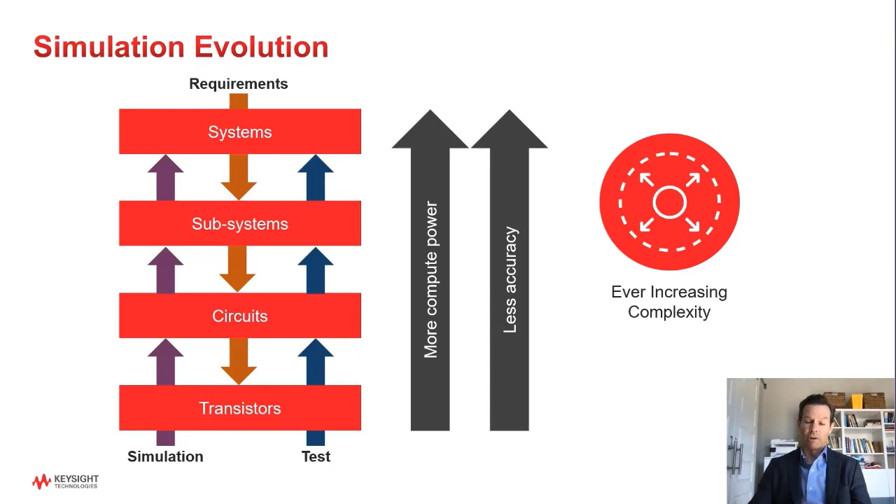We would need to make sure that our communications are secure and our products are safe and effective before they are deployed. This is where high-performance cloud computing comes in. Until recently, cloud computing was optimized for things like e-commerce. Now, Amazon, Microsoft, and others have added very high-performance compute machines to their clouds, which enable highly complex simulations. We can now apply an almost limitless on-demand amount of computing to these problems.

This means that we could take on larger, more complex simulation challenges, and that our simulations can have higher fidelity than we ever imagined. This has enabled a surge in model-based systems engineering, or MBSE, and digital twins. Neither of these concepts is new, but both are becoming more common and more practical with the evolution of the cloud. For example, the market for digital twins is growing at 40% per year.

Keysight is a leader in simulation, especially in the areas of wireless circuit and system simulation. However, simulation by itself is not very useful. After simulating your system, you're going to build a prototype and you're going to want to see how it works and where your actual products differ from the simulation. And then what do you do when the test results don't match the simulated results? Was it a defect in the way the device was manufactured?

Was there an error in the way the device was tested? Did the test equipment use different measurement algorithms than the measurements made on the simulated domains? There are a lot of questions and a lot of variables to consider. It becomes very difficult to correlate your simulated results and your real results.

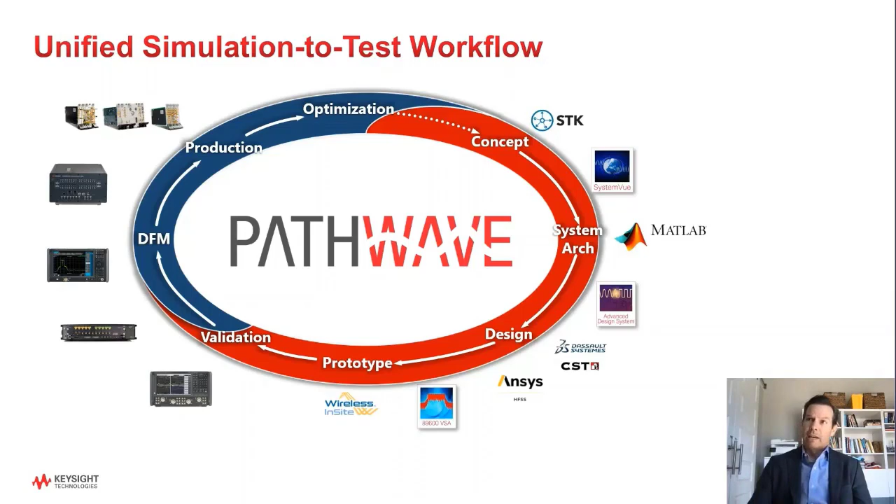Next, you're going to hear more details about how Keysight and our partners are working to improve your development flows.

Enjoy. Hello, my name is Mark Lombardi. I am a space and satellite workflow solution architect working for Keysight Technologies.

Here today to present Escape Velocity: using modeling and simulation to enter a new design orbit. The intention of this paper is to highlight some of the unique challenges in the space industry today, and how modeling and simulation and digital transformation as a whole can help move the space industry forward and accelerate design and innovation. These are exciting times in the space industry.

So much change and innovation. We have reusable rockets. No longer are the stages necessarily falling into the sea and being wasted. Companies like SpaceX are relanding those stages and ultimately driving down the cost of getting into space.

We're seeing innovation in small sats, especially in low Earth orbit, where the designs can be scaled differently. They don't have to last for 30 years like the old geosynchronous satellites did. That means you can make trade-offs based on less radiation exposure, maybe use more off-the-shelf components, even use components that haven't been space tested yet.

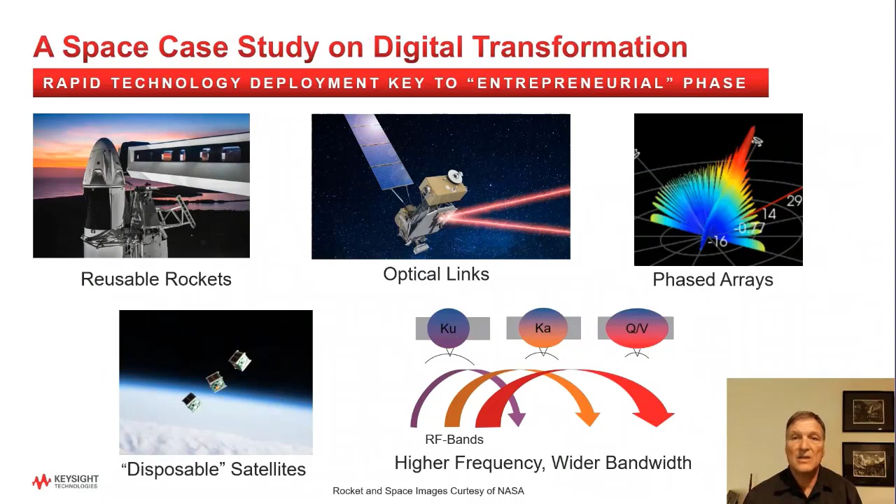This really points to the idea of doing as much as can be done early with digital transformation. I'd like to now delve a little bit into the workflow. If you think about design from concept all the way through to operations, say putting a satellite in space and actually getting data, whether imagery or other missions, you have a beginning and an end, and usually that was thought of as a linear process.

Then in the 90s, or maybe a little earlier, the concept emerged that there were similarities between the early parts of that phase and the latter parts, and the V diagram was built. I think of it from the test perspective as something like a test that might be developed and done in early R&D could be leveraged or inform the tests that are done later in production.

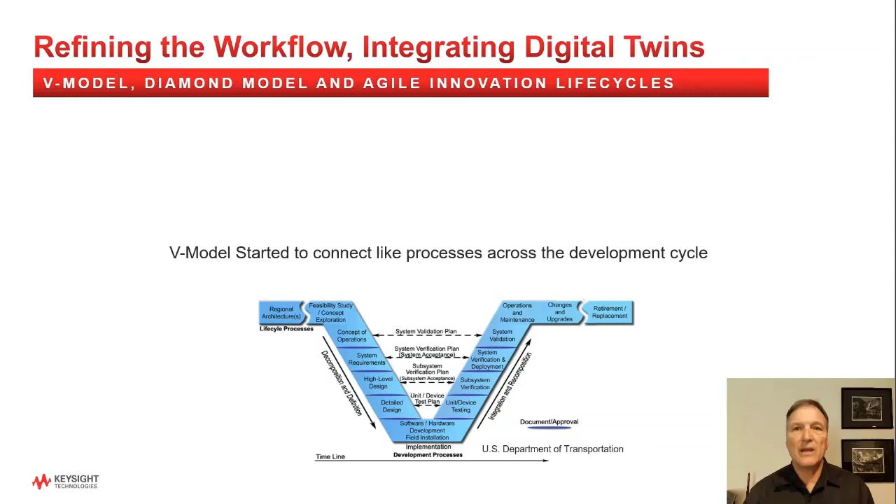A nice build that's recently come out in 2020 is from Boeing. They've built out what they call the MBE, or Model-Based Engineering Diamond. What I like about this is it builds from the V. Think of the V at the bottom as being the workflow of the physical development, but it gives equal weighting to the digital design, or the digital twin, that moves along and develops along with the physical design that you're building.

What's nice about this is the data or the digital twin can help inform the physical test and physical development, and it's valuable all throughout the design. So people typically think of simulation early in the development cycle, for example, when you're just starting to think through the plans, trying out some designs before you actually start to physically build the design. But people leave the digital design behind many times as they move forward.

In this vision of the future and design, what we see is moving that digital design, or the digital twin, along with the physical development. In this case, you could look all the way to the endpoint. For example, they mention virtual support that goes along with the physical device being supported. This gives you another tool, and you haven't left behind all that investment you've made early in developing your digital twin and digital transformation, which carries through the whole development cycle.

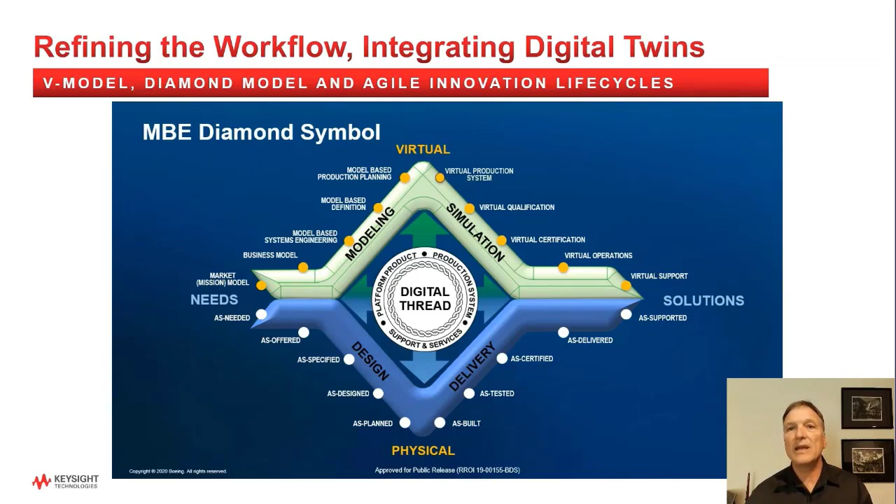From here, I'd like you to consider another build, and that is if you now see the value of running the physical design and the digital design or simulation along with the development cycle, we can look at this model in yet another way. We can take the ends of that model, which somehow indicate inputs and outputs. Of course, you start with an idea and you end up with hopefully a product. And in this case, a satellite, let's say.

But there's more to it, that everything that's come before, if we keep the data, if we keep the designs, and in this case, those two lines are indicating the physical and the virtual design moving along together throughout the life cycle. You see, ultimately, you can use the data that's in the field, the system that you actually deploy, then to inform and feed the next design phase.

What's also important to realize is once you have this concept of data that is persistent and information that is persistent and leverageable and usable throughout the design cycle, that any time is a good time to start. For example, I could start collecting data today on a manufacturing process or a part that's in manufacturing.

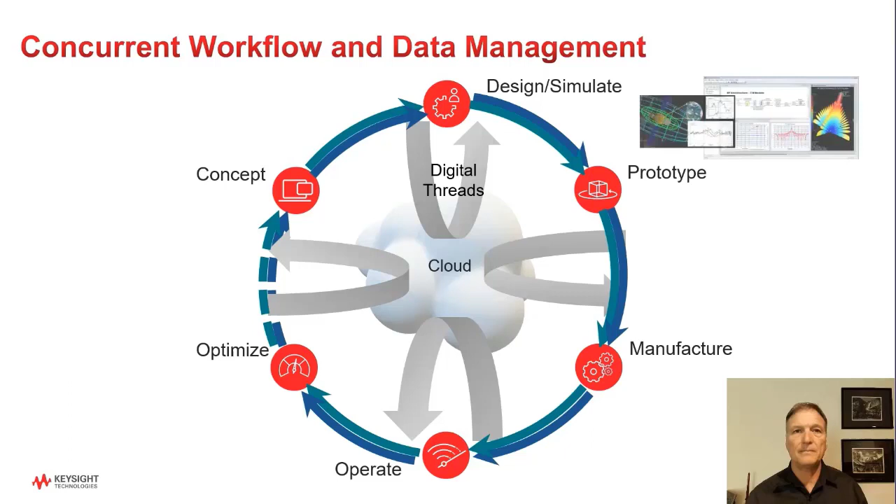And we populate that by showing the different tools, both software and hardware, and showing that interface that test equipment uniquely provides, which is a bridge, or some people might call it a digital thread, that allows physical measurements, physical things to then inform the digital twin.

The digital information, or the digital models and simulations, can be used as information that can be put into a software-defined piece of test equipment and allow that test equipment to fill in for the physical parts that may not be available yet.

So you can see, if you use this correctly, what you can do is move very quickly and not get stopped because of a delay in either the physical or the virtual design, that one can inform the other, and you can move back and forth efficiently between the two as long as you're connecting the data.

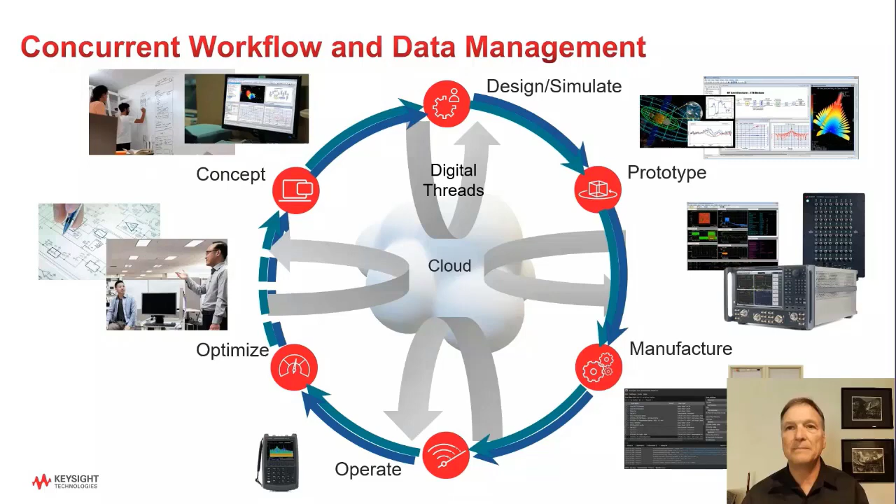One way we've talked about this is in the idea of reducing risks. Space has a lot of risk associated with it, and really one of the fundamental changes is moving to higher risk profiles, some would say. The other way to think of it is, there's only so much risk you really do want to take on. And over time, what you hope is that your design starts to get better and better.

One of the things that we can do with digital twins is we can start to now move that confidence level up, because we start to have more confidence in the models. They're persistent. They're there whenever we need them. We're checking them throughout the development cycle.

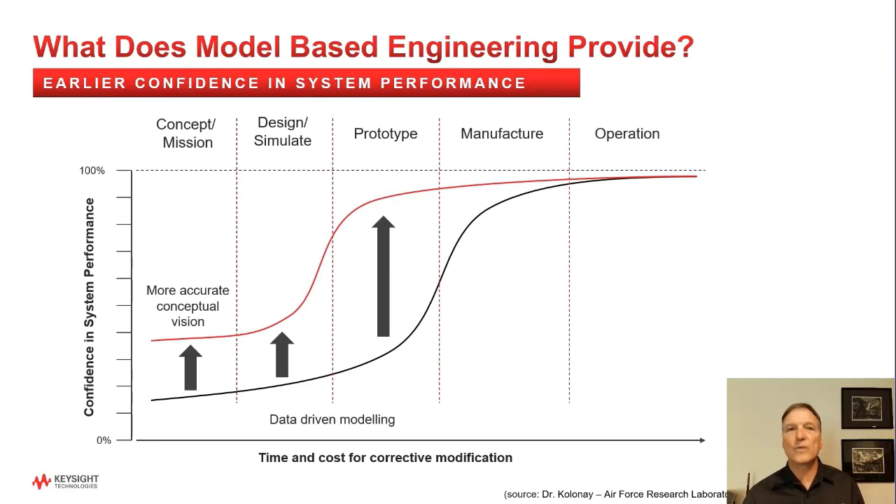And you can either think of it as a shift left, some people think of it, but I think the better way to think of it is the way the Air Force Research Laboratory talks about it, and that's this idea of reducing risk or increasing confidence in the design, ultimately then leading you to faster development cycles and quicker turns to the next design.

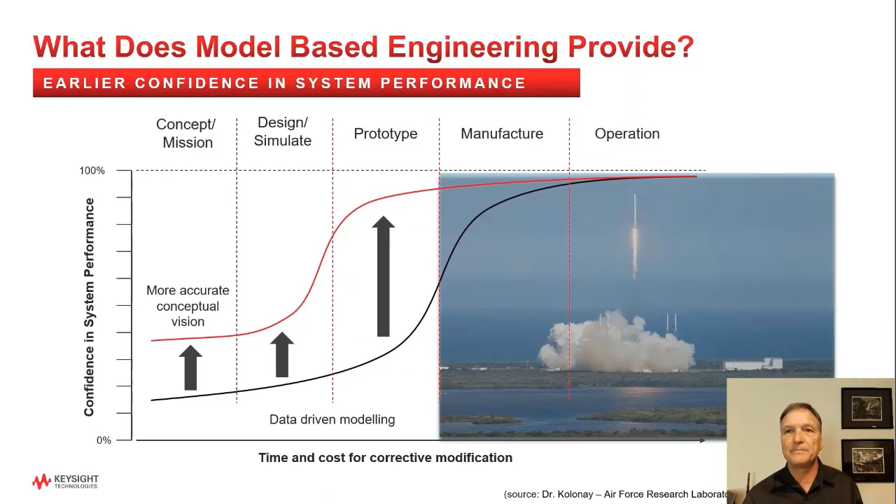We see in the space industry, and actually in many industries, there's a unique inflection point that we're entering with model-based engineering and model-based design. The needs there, obviously, the risk associated with some of the space programs, the complexity, the use of off-the-shelf components, the use of components that haven't been tested in space yet. So how do you get confidence in those? The need there is to have digital representations of these systems to help increase confidence, reduce risk. The enablers are starting to come into place. We have more computing power than we've ever had before. We've got cloud storage or cloud access where people can interchange or share or keep the data persistent.

The digital twins are coming of age. They're getting better and better. The models are getting better. They're getting tied all the way back to physics. And that's always been possible. The problem is that it takes time and it takes lots of computing power to do that. Now that's falling into place.

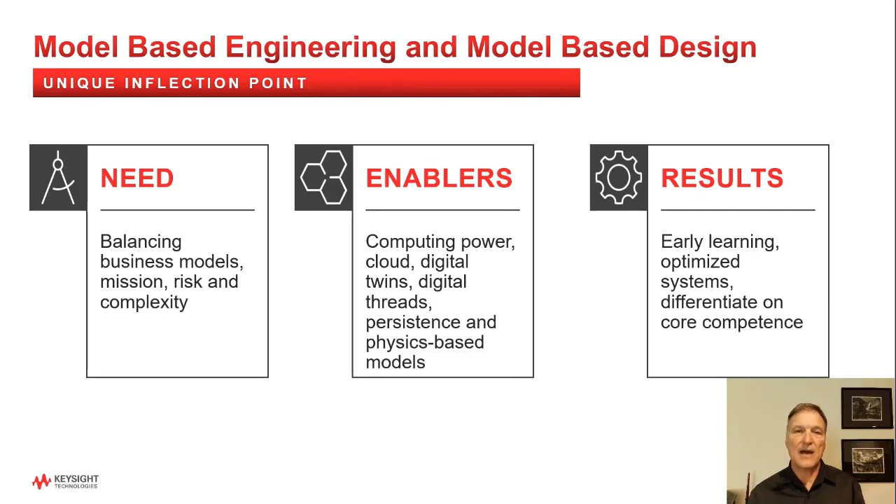And the results for following digital mission engineering, or model-based engineering and model-based design, is you can learn early or fail fast. You optimize systems. In other words, in the design phase, you have more time in virtual design and simulation where you can optimize the design, and really you can focus on your core value that you're bringing to the system. So instead of spending time on the tools and integration, as Dr. Roper talked about, we're spending our time engineering and adding value to the project we're deploying.

I'd like to end on a thought, and it's a quote from George Box. The quote goes, 'All models are wrong, but some models are useful.' And I think that's a well-accepted understanding that models can inform. They're only as good as the models, and they're only as good as our understanding and use of those, application of those models. But I like to consider that if you use models correctly, and you use models and simulation throughout the life cycle, those models then become lasting and persistent, and they inform the next development phase. And so I'd like to leave you with a Mark Lombardi quote, and that is, 'All models are wrong, but persistent, authoritative, intersecting models are very useful.' With that, I hope you have a good day. Goodbye.

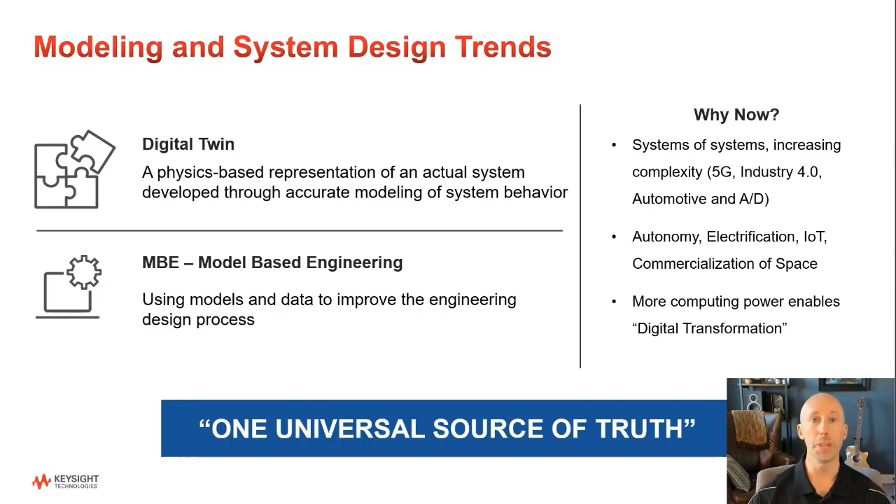We have the ability to model channels and terrain and other types of characteristics, both in our product and through partners such as the ANSYS STK product. And we also have the ability to do measurements of those either in our vector signal analyzer software or with built-in calculations. We can include scripting or additional post-processing in tools like MATLAB or Python.

And once you've done this type of analysis, it's available to download directly to Keysight sources and analyzers, either for additional use in the testing domain or for types of analyses that just aren't possible within the simulation environment. So this already is a representation of how customers can implement a digital engineering flow directly using PathWave System Design.

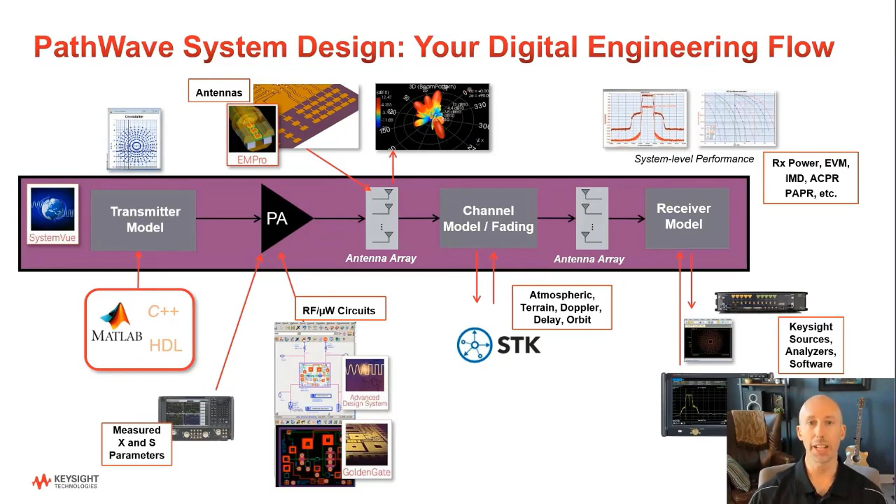So now let's get into the exciting parts of the presentation and show you some of the new features that we're bringing to PathWave System Design 2022. We already see PathWave System Design as the most advanced RF phased array design platform on the market, allowing you to very rapidly architect and simulate the most complex and advanced phased array designs.

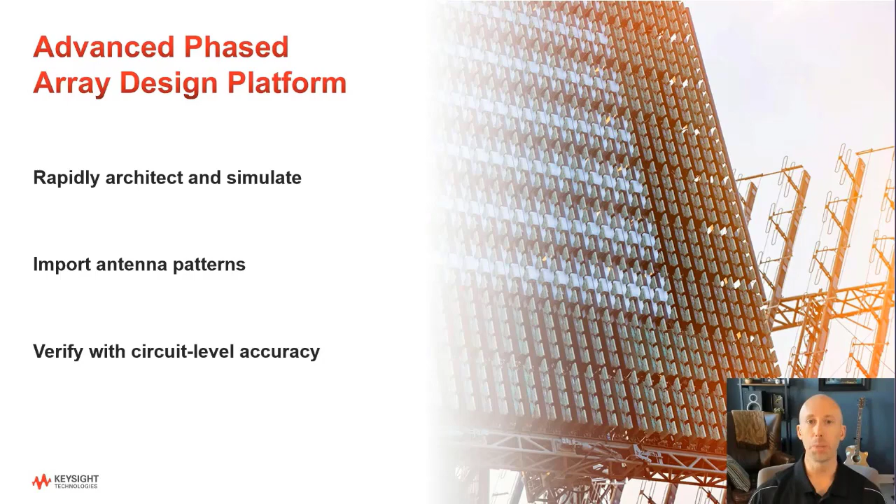We've made it extremely flexible and easy to import any kinds of antenna patterns and really give you the ability to verify these antenna and array designs with circuit level accuracy, whether that's measurement or behavioral models, and also bringing in that critical RF modeling, including interactions between the components, circuits themselves, and the antennas.

Building on those existing capabilities, we've added an exciting new feature for channel-specific impairments. This is really critical in the area of phased array design because in most cases, the transmit and receive channels are going to be different, maybe different components or different types of settings, depending on where they are in the array, particularly with very large array structures.

So with this new feature, we can set up specific groupings of types of components within PathWave System Design. These different groups can have different parameters, including different statistical variations to represent realistic behavior when you do something like a Monte Carlo analysis or looking for behavior over the lifetime of an array.

But this wouldn't be very useful if you had to try to set this all up directly from the standard user interface. So we've added a visualizer which gives you the ability to preview exactly where these groupings are structured and validate how you've implemented this in your plan.

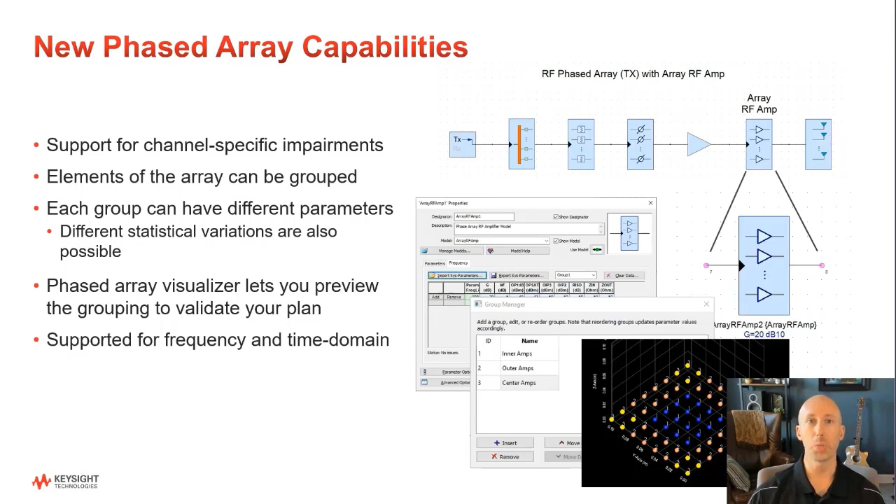This is supported for both our frequency domain phased array analysis as well as our time domain data flow capability for simulating phased arrays with modulated signals. Let me show you exactly how this works with a brief demonstration.

In this demonstration, we're going to show how these RF amplifiers can be used in an array. We're starting from the basic phased array RF amplifier transmit template. You can see that we've got a number of amplifier components, including our original amp RF, and the new phased array RF amplifier component. If you look at the parameters of the amp, you'll see that it only has one value for all of the different RF parameters.

However, if you go into the array amplifier, we're going to find how we can set up different groups. Going to the Frequency tab, you'll see this new group box. Clicking on Manage Groups, we can now add a number of different groups to this amplifier component. In this case, we've added 3 groups.

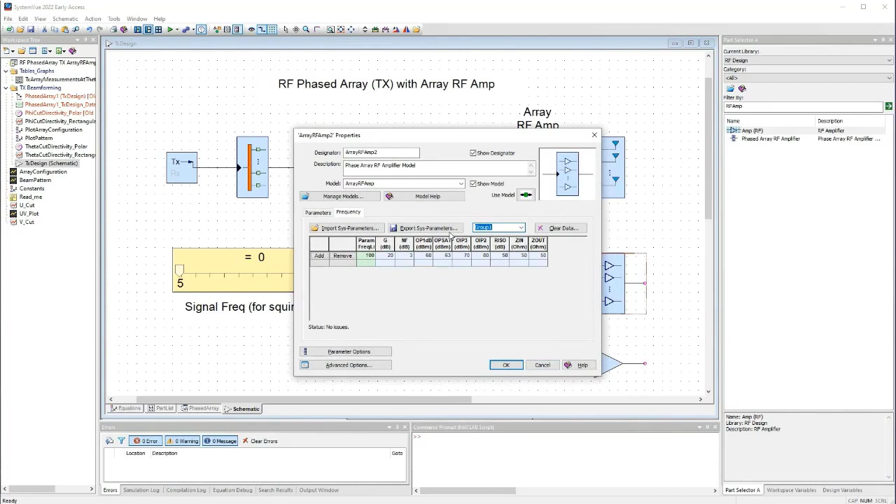Going back to the parameters section, we see that the group names now appear, and we can see the 3 distinct groups. We can now assign different values to each of the RF parameters based on which group they're in. In this case, we can set an array value for noise figure of 5, 2, and 3, corresponding to the different groups that we're using.

In this case, we've already set up an array RF amplifier, and we've used 3 names here: center amps, inner amps, and outer amps to represent their location. The group map tells us where these go, and we'll come back to that in just a moment. But you can see we've added the same gain for each amplifier, but different noise figure, 1 dB compression point, saturation, IP3, and IP2 values.

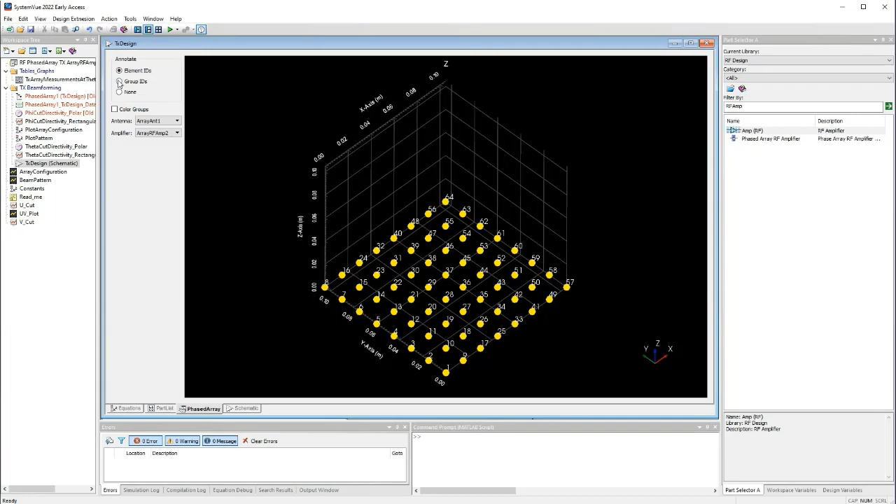We're able to visualize this by using our phased array visualizer. By default, this was used to show the element IDs, and they're all described with the same figure. But you'll notice now there's a new option called Group IDs. If we select Group IDs, you'll see the array components now are listed by the number of group that they're in. You can also choose the option Color Groups in order to clearly indicate which group elements are in which locations.

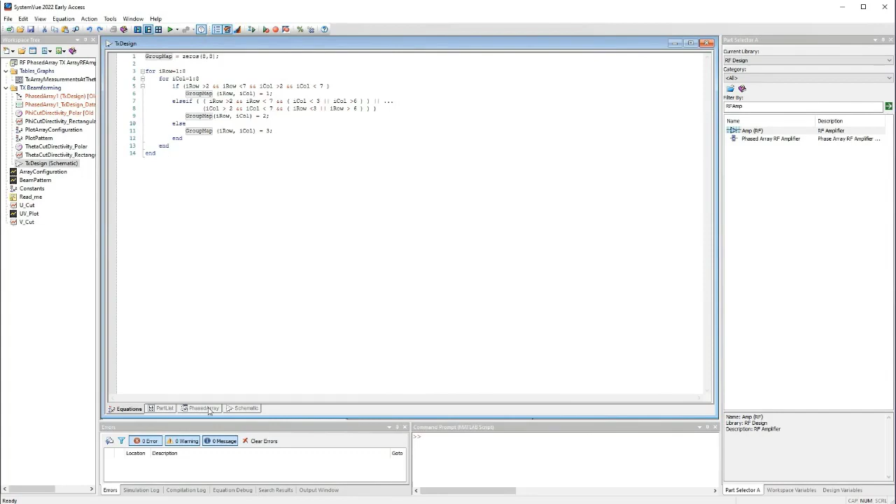In this case, we've defined this group map using a simple script in the equations section. This gives us an easy way to set which components are at which array positions. Once this is done, you can perform all of your traditional phased array analyses, such as the beam pattern, phi cut, theta cut, and the phi cut directivity plot. So these new capabilities are essential in order to accurately predict realistic phased array analyses.

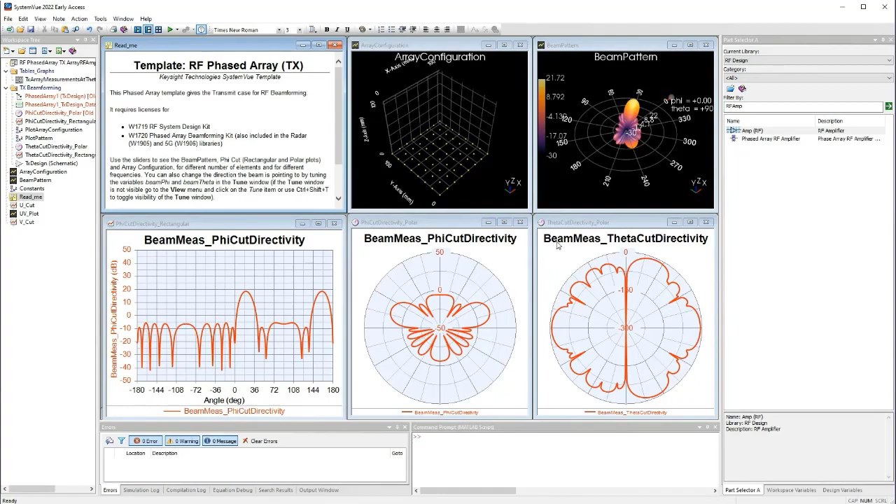One of our biggest areas of investment in this release has been in our radar systems design capabilities. As you know, radar designs are not simple systems. They're very complex with a number of RF, analog, and digital components, especially on the signal processing side, but with also advanced capabilities in the RF domain as well. Setting up such a complex system has been a challenge in the past, especially including numbers of different targets and scenarios and trying to test that radar in real-world conditions.

What we've brought in this release is a much simpler radar system configuration with improved visualization and the ability to easily verify that system performance against your mission parameters. Let me start by talking about how we've improved the system configuration. We've got a brand new user interface that allows designers to very easily choose from different simulation configurations and then choose what types of environmental and technical modeling factors they want to include in the analysis. This could be different objects, signals, jammers, clutter, or other types of non-idealities that need to be modeled in the system.

Once the user configures this, it's going to automatically generate a system-level schematic that will represent all of the things that were chosen and configured in the user interface. The user can run this simulation directly from the interface without ever having to manipulate the system design schematic itself. But for advanced users or for advanced configurations, that schematic is there and available for different types of analyses.

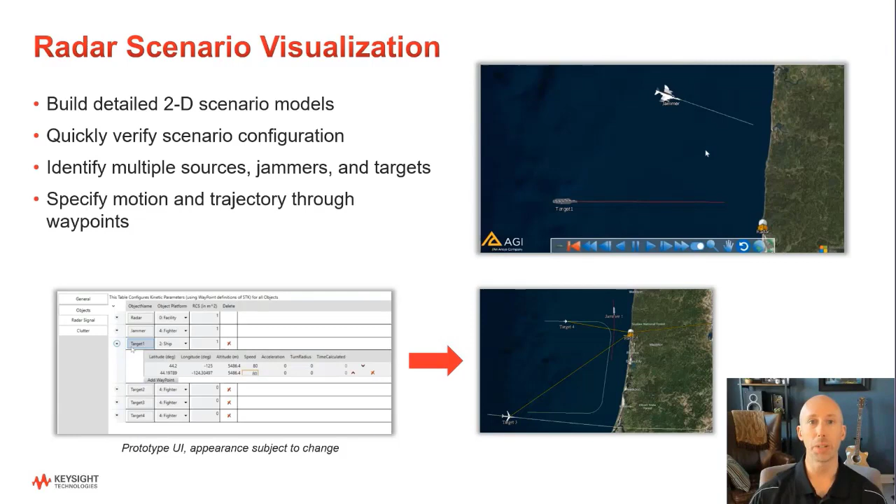And we're very excited to have partnered with AGI and their STK visualization capability in order to provide this to you. This is going to be available in our aerospace and defense advanced visualization product coming when PathWave System Design 2022 ships later this year.

And speaking of our partnership with AGI and the STK product, I want to remind you that PathWave System Design has a direct interface to the STK software. So when your radar system has reached a level of complexity where you need additional capabilities, the 3D kinematics, additional dynamics, or much more complexity of your scenario or mission, we still have the integration available to bring those scenarios directly from the STK software and link those into PathWave System Design.

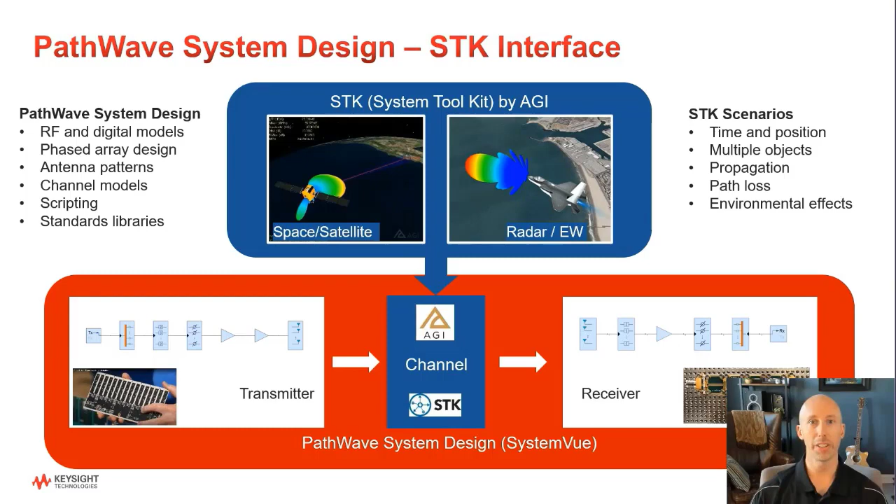This is an easy way for system design users to be able to take advantage of complex mission and scenario modeling and give a much more detailed digital design and digital engineering representation of the overall system behavior. Now let's head to a demonstration and see how this looks in real life.

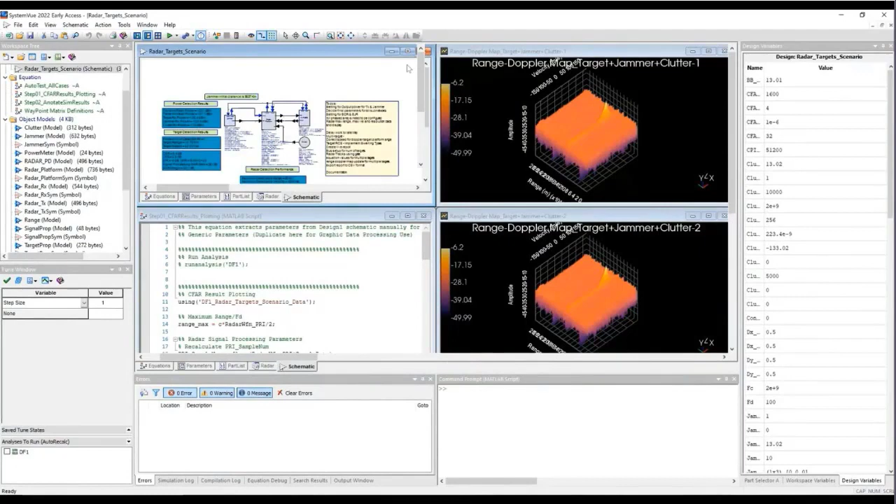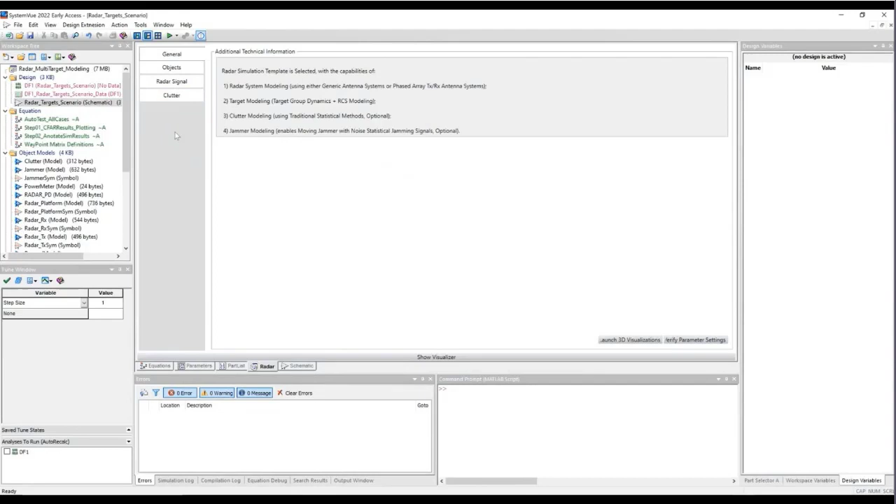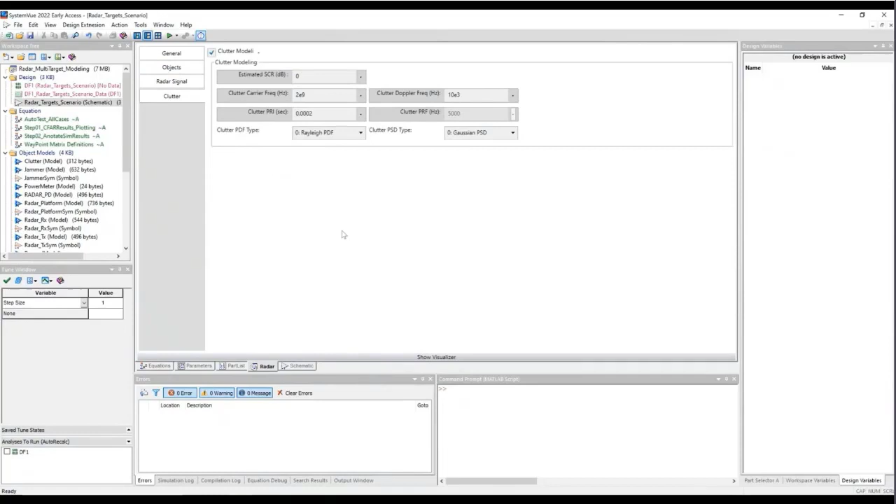This type of advanced radar analysis is possible using PathWave System Design, but this schematic can easily be created with our new radar GUI. Within the UI, accessed from the radar tab, you'll be able to set all of the different parameters of your radar system design. The radar signal lets you choose the modulation type, phase coding, as well as radar signal processing parameters, details about the carrier frequency, output power, wavelength, and sample rate. Clutter can be added as well from multiple components of our radar library for different types of clutter and effects.

The key is adding objects to this as well. You can add multiple targets using the UI, and you can configure the type of behavior, whether a target, a jammer, or the type of vehicle, such as a drone, ship, facility, aircraft, or a ground vehicle.

But the benefit of this new UI includes advanced visualization. We need to be able to see whether the configurations that we've entered are really what we're trying to model in the scenario. Each of the targets can be given a position, altitude, speed, and additionally, more waypoints can be added to include turns and adjustments to parameters.

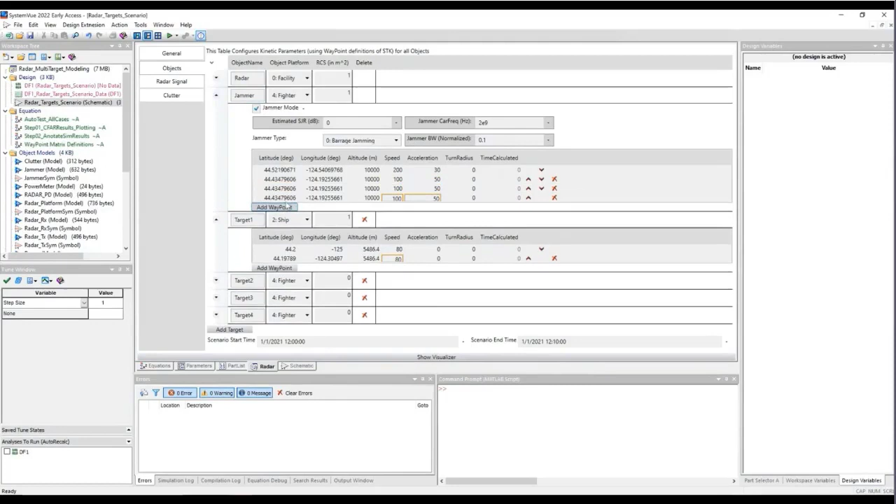For example, in the fighter case here, we're able to add acceleration, turn radius, and multiple dynamic behaviors, as well as additional waypoints. Once the visualizer is launched, you can see each of the targets that you've defined as well as your radar system. You can then put this into motion to see the actual trajectory and behavior of each of the objects that you've defined in your system.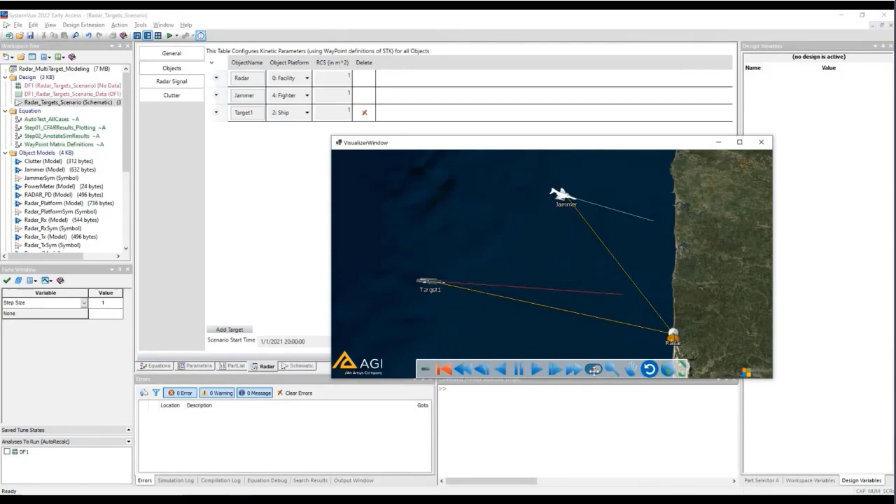This is made possible through the integration of STK by AGI, an Ansys company. Using their advanced visualization capabilities, we can provide users with a dynamic behavior and understanding of their scenarios. As I mentioned earlier, one of the ways to achieve a universal source of truth in your simulation and test methodology is to make sure that you're using the same measurement science behind both your simulation and your test environment.

PathWave System Design has a very tight integration with our PathWave Vector Signal Analyzer product. This gives you the easy way of representing your measurements in the simulation environment using the exact same interface that you'll be using in the testing environment. This is an integrated workflow where configurations of your PathWave System Design analysis directly create the required setups that are used in the Vector Signal Analyzer.

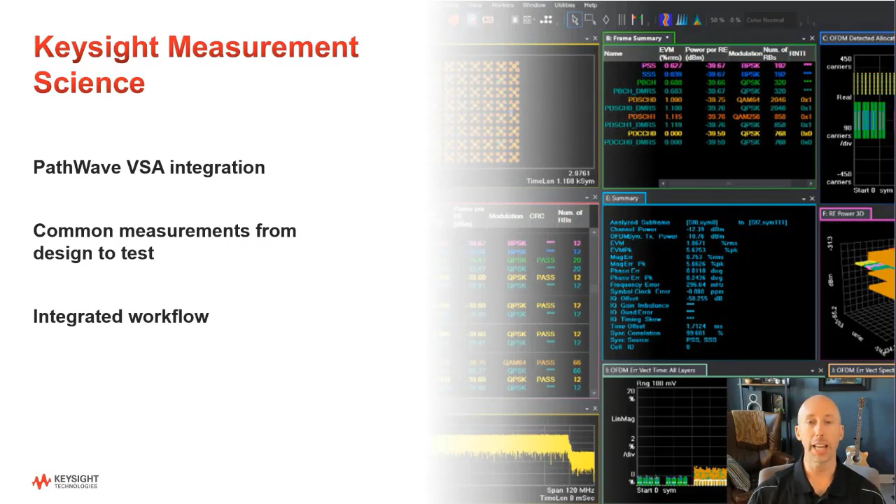This lets you take things directly from the simulation environment into the lab testing environment using identical configurations and keeping that common measurement science available. In PathWave System Design 2022, we've enhanced the connections to the Vector Signal Analyzer software and tightened the integration for an improved user experience. What this means is much faster measurement initialization.

So going from the point where you press the simulate button in System Design to seeing your results displayed on the Vector Signal Analyzer is greatly reduced and much more like the behavior of just running in PathWave System Design natively. We've also added new exciting capabilities to use the Vector Signal Analyzer not just as a sink, but also as a source back into your PathWave System Design analysis.

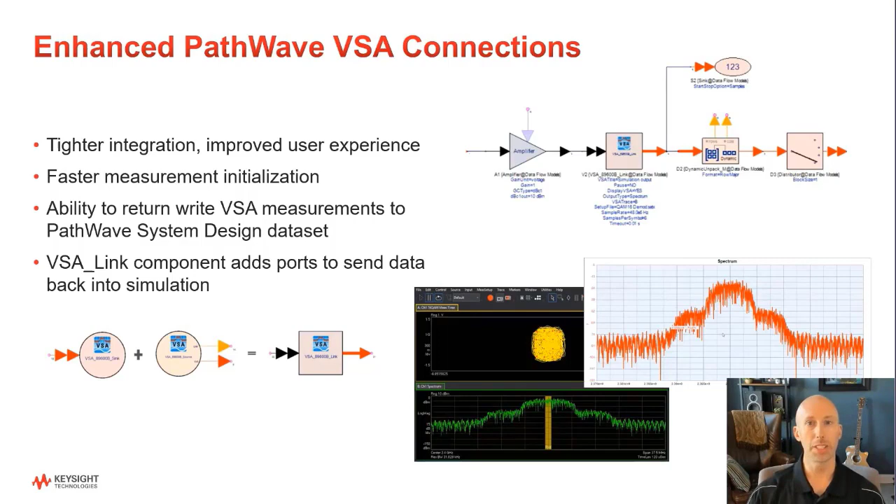The new VSA link component takes data out of PathWave System Design simulation, processes it in the Vector Signal Analyzer, and gives you access to numerous measurements coming directly from the VSA software to loop back into your system design. This allows for some exciting new capabilities in closed-loop feedback or other types of signal processing that aren't possible directly in the VSA software. Now let's see this improved VSA integration in action.

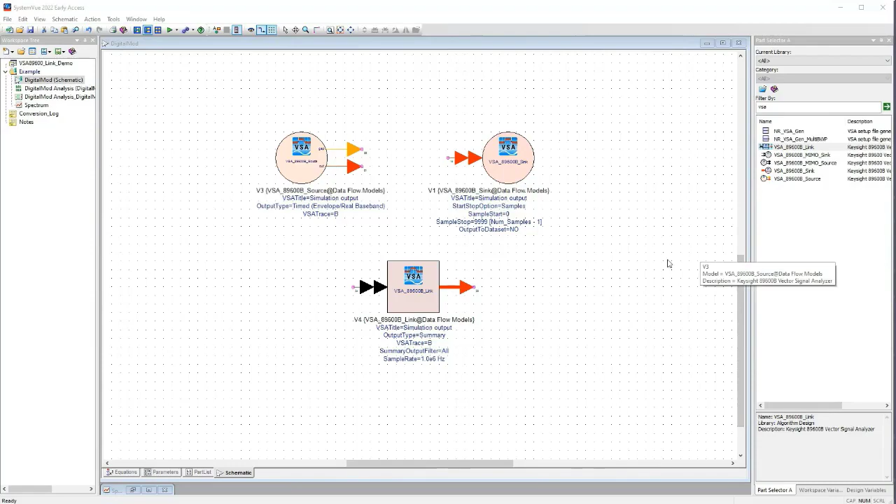In this demonstration, I'll show you how the PathWave System Design VSA link works. In the past, we've had access to a VSA source and a VSA sink model. But now with this 2022 release, we've created the VSA link component, which is effectively a combination of the source and the sink measurement functions. This allows you to output data from the VSA back into your PathWave System Design schematic.

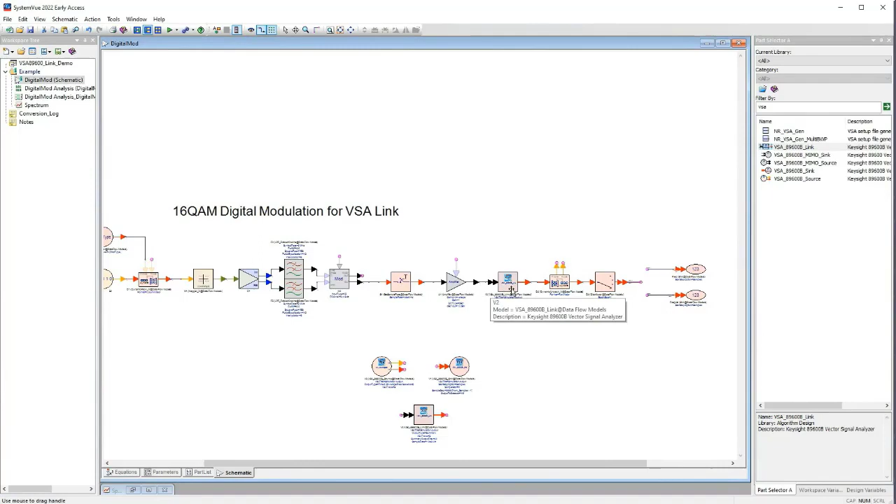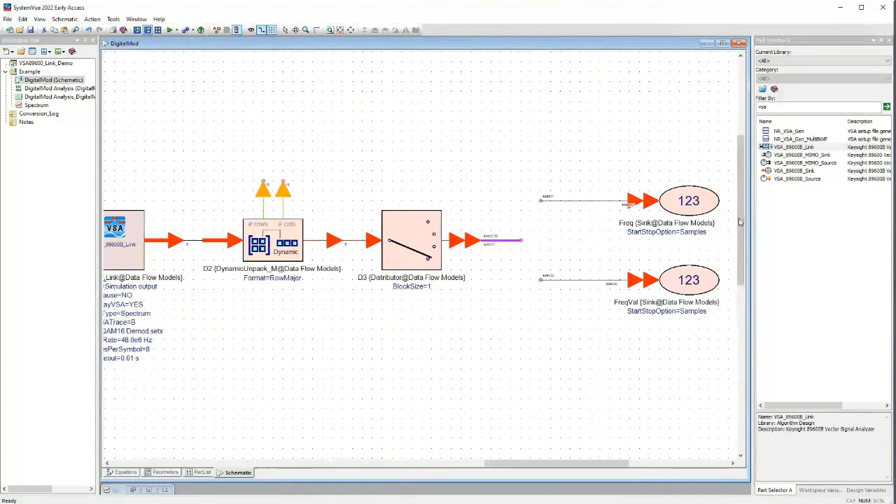To demonstrate this, we have a simple 16-QAM digital modulation. This is built using standard PathWave System Design components, but you can see what would typically be the VSA sink has been replaced with the VSA link component. The output of this goes into some signal processing and then is output to our traditional sink models.

One thing to note is that within the VSA, this runs typically the same way that you would with the VSA sink. However, the measurement will pause automatically so that you can capture the data and it can be sent back into PathWave System Design.

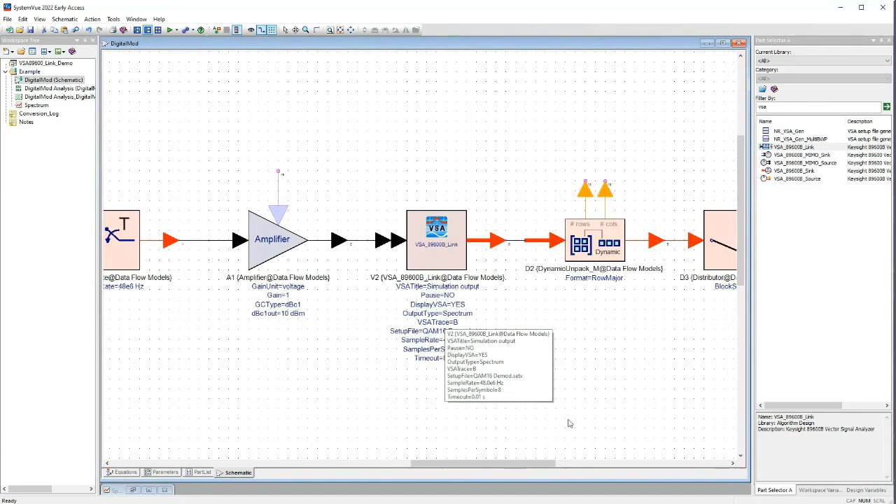In this case, we've set this to pick up data from VSA trace B. If you note, the VSA windows are lettered. So by using the letter that corresponds to your desired measurement, you're able to output that data, in this case the spectrum data, back into PathWave System Design.

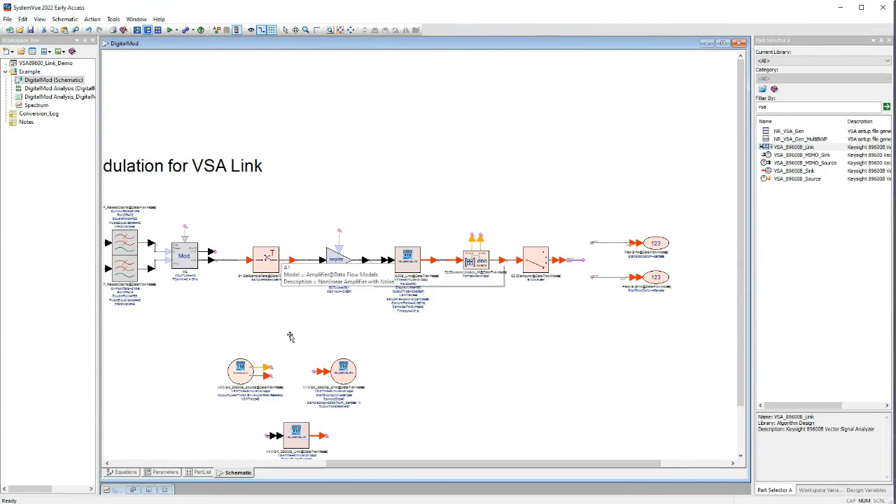After running the simulation, we can look at the graph, and you'll see that we've got the exact same spectrum measurement available in PathWave System Design that we saw in the Vector Signal Analyzer software. Obviously, these measurements aren't just limited to spectrum, so you're able to pull any type of measurement from the VSA software and bring that back into your PathWave System Design schematic for further analysis.

Thanks for joining us for this preview of PathWave System Design 2022. We've highlighted exciting new advancements in 3 areas: phased array, where we've continued to improve the most advanced RF modeling platform available for phased array analysis for increased simulation realism.

We've also made major enhancements in the radar system design workflow, making it easier to configure and visualize complex systems and scenarios to get you to your performance analysis much faster. And finally, we've enhanced the workflow between PathWave System Design and PathWave VSA, giving you that common Keysight measurement science analysis capability and giving you new capabilities for feeding that information back into your system level design.

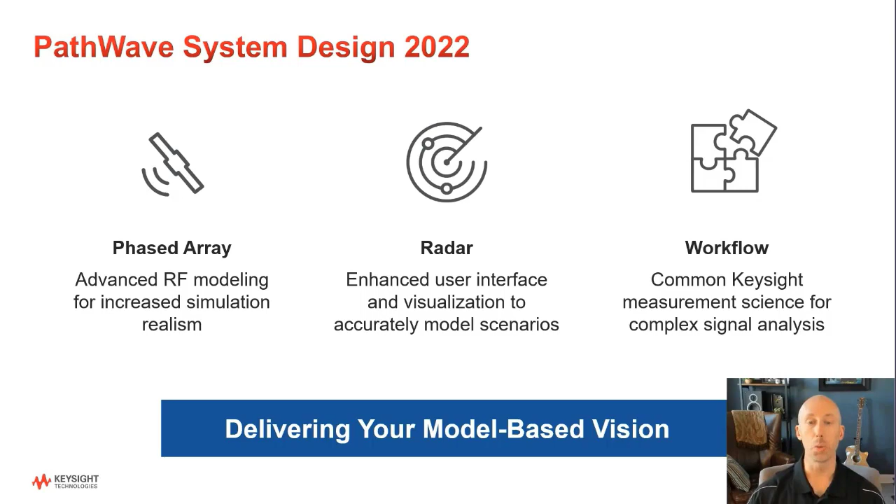Here's our first question. I saw that Keysight VSA software has pulse analysis for radar. Can that be used to analyze a system if you're using the new radar interface? Well, yes, absolutely. As I mentioned, you'll be able to run your simulations directly from the GUI, or you can modify and interact with the schematic that was created. Designers can easily insert the VSA sink analysis and then process the results directly in the VSA. You could also couple this with the new VSA link feature and feed those measurements right back into your system design.

Okay, our next question asks, do you see the digital engineering and model-based design trends just in aerospace defense, or is this a bigger movement? That's a great question. Yes, this is definitely part of a bigger movement. Projections range dramatically, but as you saw in the keynote, these markets are seen in general to be growing on the order of 40% per year. As an example, companies like Tesla are causing the same kinds of disruptions in automotive that their counterpart SpaceX did in the commercial space world. So yes, I expect to see these trends across all the industries that we serve here at Keysight.